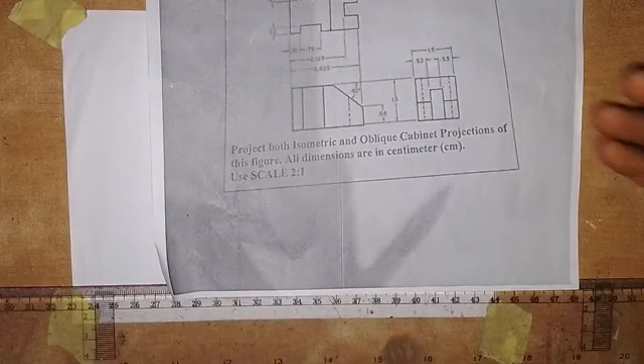Now we want to work on the oblique cabinet projections of this object. The dimensions that are used for the isometric projection are what I'm using for the oblique cabinet projection of this. So let's start and see how it could be done. And don't forget that when it comes to the oblique cabinet projection, the length of the receding line will be divided into two, then we'll draw half of it, so don't forget that.

So what I need to do first is to draw a horizontal line like this, and then I'm going to take my 45 degrees set square. We're using our 45 degrees set square in this case. With the 45 degrees set square, I'm going to draw the receding line in this direction. Okay, so at this point I'm going to draw a vertical line, and then I'm going to take a measurement of 40 millimeters.

It's only the receding line that we divide into two, so every other dimension of the object will remain as they are given. Okay, so here I will draw a vertical line. The length of the receding line originally is 80 millimeters, so I'm going to take it as 40 millimeters. So it will be 40 millimeters here now for the cabinet projection. So here I'm going to draw a vertical line like this.

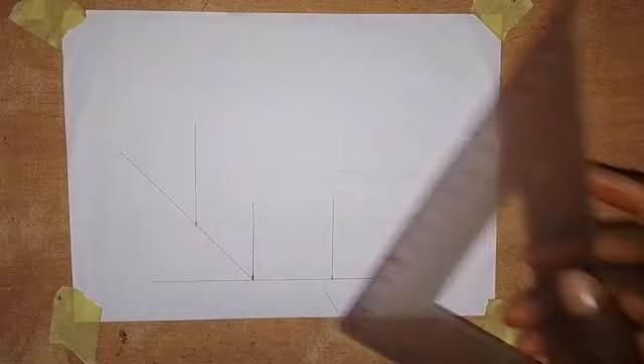Okay, so then the height is 40 millimeters. So here I will take 40 millimeters. I need to extend this a bit and also extend this a little bit. Then with my 45 degrees set square, I will transfer this point to the front here. Then I'm going to draw a horizontal line at this point. Also at this point I will draw a horizontal line. Then this point I will transfer onto this line here, like this.

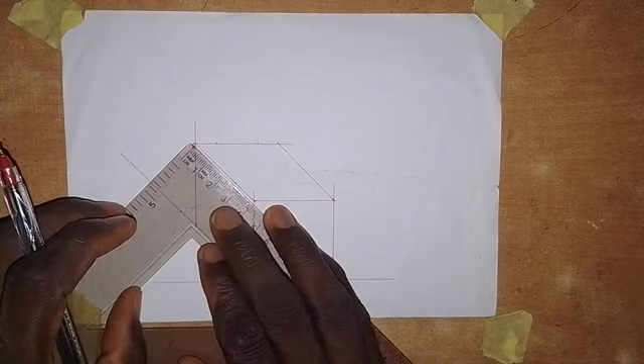Okay, so the next thing I'm going to do is take a measurement of 10 millimeters here on this line, and also 10 millimeters here on this line. Instead of 10 that we took on the isometric, it becomes 5 now. But before that, I need to work on this part. The distance from here to here I took as 30, so it becomes 15 millimeters now. So this is 15 millimeters here. I'm going to transfer this point here to this side like this.

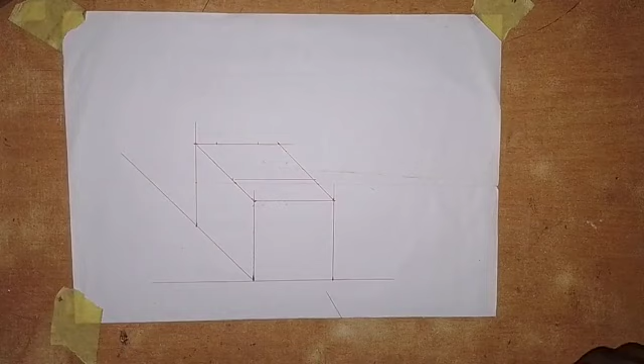Because we are taking it on the receding axis, that's why we need to divide it into two, so don't forget that. But if I'm to take any dimension here, it remains as given. This distance from here to here I took as 18 millimeters, so it remains 18 millimeters here on the cabinet oblique view. As I said, we are not going to do anything with that dimension given to us. So here I draw this line like this.

Then I'm going to join this point here together with this point. Then I will also join these points together like this. Alright, so now let's go and work on this part here. We took it as 10 millimeters there in the isometric, so it becomes 5 now. So I will take 5 millimeters from here to this point here. And then from here again, I'll just take 5 millimeters. So this is 5 millimeters.

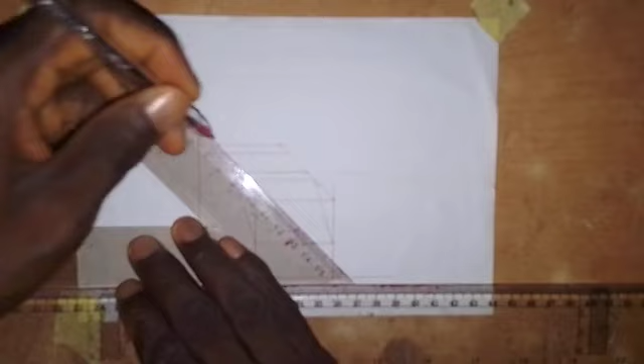I'm going to transfer these points to this side. This also I will transfer to this side, and then I will draw from here to here, and also from here to here, like this. At this point, I'm going to draw a vertical line that goes down like this. At this point also I will draw a vertical line, and also at this point. There is a line at this point, so I think it will coincide with this.

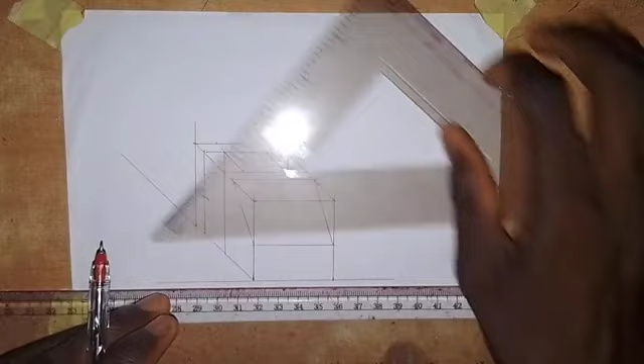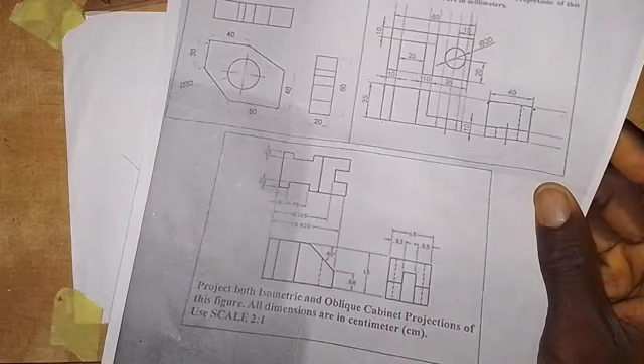Then I will draw a line at this point, just a horizontal line, so it goes like this. What we just need is to work out what we have here on this surface. When we worked this out, we used 15 millimeters. As I said, I just put my own dimensions here because I can't see the dimensions given, though they said dimensions are given in centimeters. So that's why I just use the dimensions that I want. When you are doing your own, please use the dimensions given to you in the work.

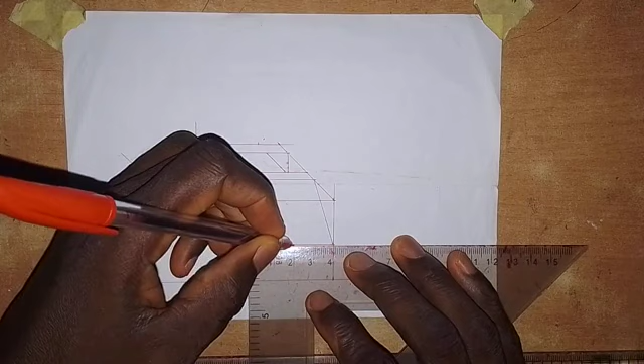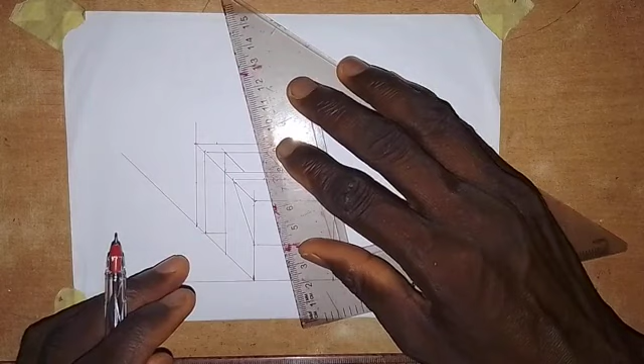All right. So this 40 I'm going to divide into 2, so that is 20. I'll also do it up here, divide this 40 into 2, so we have 20. Then I'm going to take 5 millimeters to this side and 5 millimeters to this side. Coming down here, I will also do the same: 5 millimeters to the left and 5 millimeters to the right side. Here I'm going to draw a line like this, and then a line like this here.

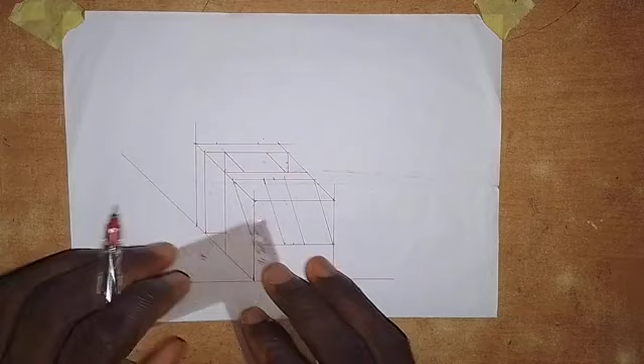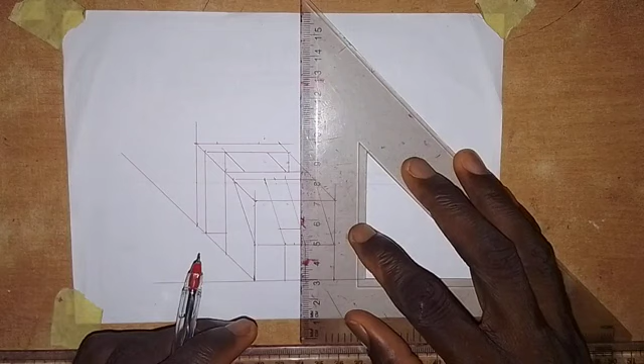If I divide 15 by 2, that will give me 7.5. Just use 8 millimeters. So this is 8 millimeters. I will transfer it to this side like this. Then at this point I'm going to draw a vertical line, and here also I will draw a vertical line. At this point here I will draw a vertical line.

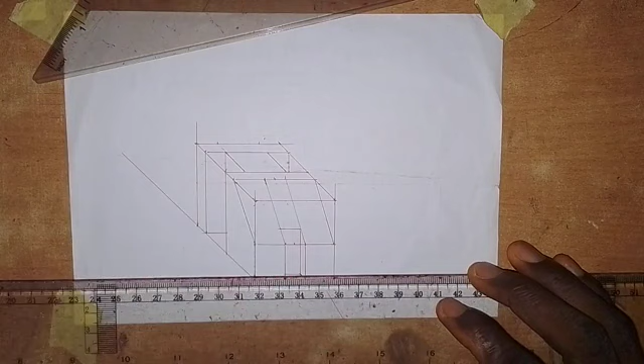Then with my 45 degrees set square I will draw a line from this point, so it goes in to touch this. Then I'm going to draw a horizontal line from where they intersect. So the object is already there. What I need to do now is to bring out the visible outline. I'm going to pause the video and do that. This is the cabinet drawing of the object, as simple as I've done it. All you need to do is to practice. When you practice, you become a master at it.